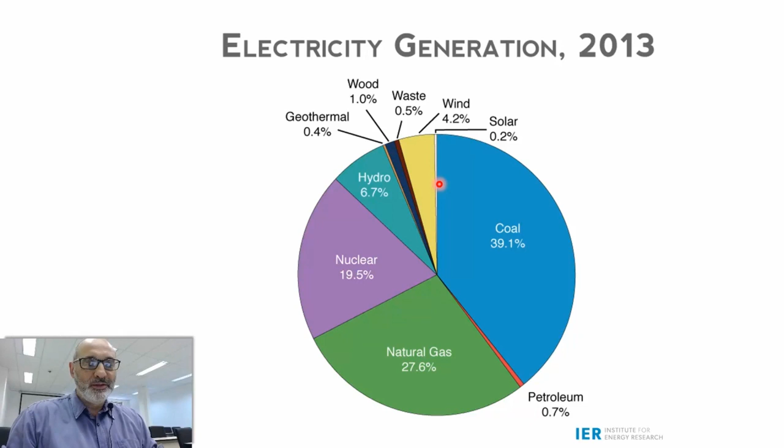I want to show you how turbines work and how we can use this information in order to optimize those systems of hydropower generation, or specifically water reservoirs. Okay, so we call them impulse turbines that are based on momentum change. Let me just make a sketch here.

This kind of turbine, for instance, you have momentum here, mass times velocity. If you have a change, you have a blade here, for instance, that changes the direction of this momentum. So it simply changes direction. By doing this, there's going to be a force. In order to do this, the blade has to apply a force on the wind, and the reaction to this force is the force that is going to be used to generate electricity. Those turbines are called impulse turbines. This small number here means reaction ratio, so it uses only momentum, change in momentum, in order to generate electricity.

Those turbines are very common, as I mentioned. Wind and hydroelectricity use impulse turbines. I put some here - wind turbine, everybody knows, but you also have vertical axis turbines, as shown here. Let me get my pointer. Those are the most efficient ones, but those types of turbines, vertical axis, for instance, are more appropriate for low noise applications. For urban generation, because you have concerns about noise generation, you may think about sacrificing a little bit of conversion efficiency in order to have lower noise levels.

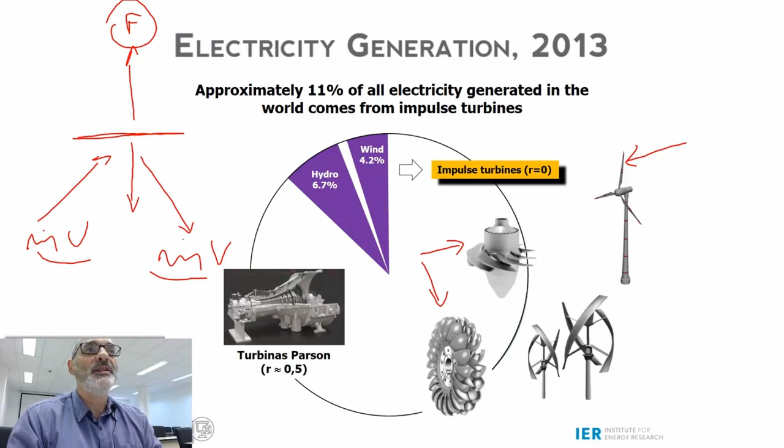Well, it depends. But in the case of wind turbines, you may build from fiberglass - these blades can be made from fiberglass. These types of turbines for water usually use stainless steel. I'm going to show you some pictures of those turbines, but that's the case: stainless steel for water turbines, and a light material for wind turbines. Composite materials, fiberglass and so on, are very appropriate for wind turbines because they are resistant and very light.

So, a word about how things go here in Brazil, because we have a very different energy mix. In terms of electricity, most of our electricity is generated from hydropower, 70.6%. This is very interesting, very good, because it's a renewable source. It's still solar energy, because it's the sun that takes the water from the ocean.

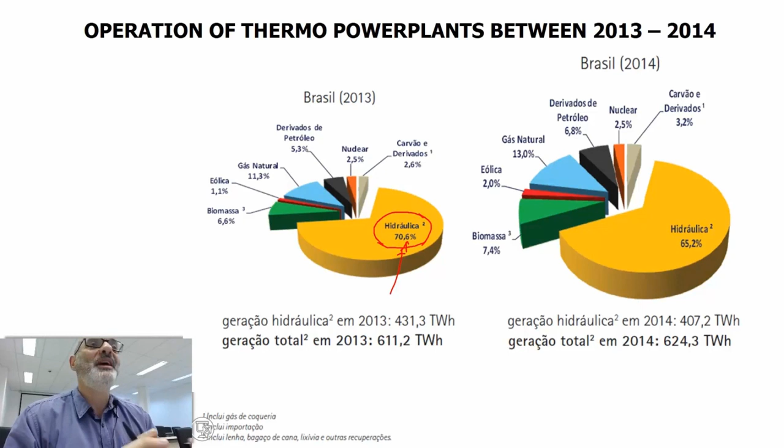So our eggs are concentrated on hydroelectricity, and the amount of rain may vary during the years. A few years ago we had some problems, especially between 2013 and 14. The amount of water available for electricity generation decreased significantly, and we had to put in operation thermal power plants. These power plants run basically on petroleum and natural gas. Simply putting these power plants into operation in order to supply electricity changed a lot our electricity mix.

You can see here, for instance, comparing 2013 and 2014, hydroelectricity decreased from 70 to 65%. Let me get my pointer, I think it's better. So this decreased, and the rest, especially coal, increased from 2.6 to 3.2. Petroleum, heavy oils, went from 5.3 to 6.8, and natural gas from 11.3 to 13.

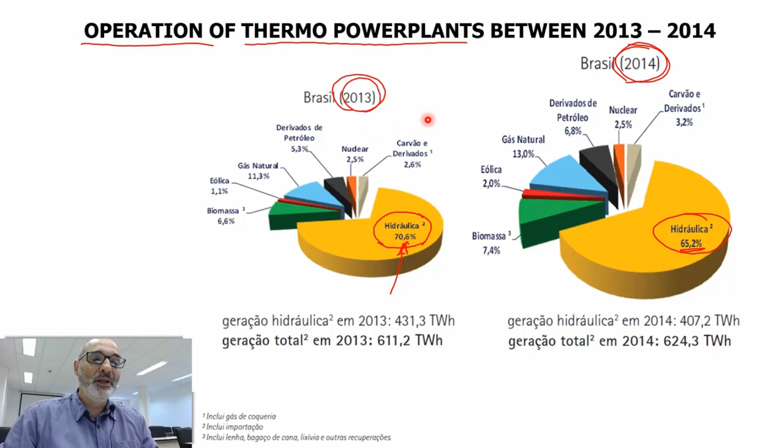But you have to do something to avoid this, because in addition, these thermal power plants are very inefficient, since they are built just to be used during one week or one month, not during a whole year, for instance. So they are very inefficient power plants. You see the importance of managing this resource. I'm going to talk today about managing this resource in order to avoid or minimize this type of problem.

Okay, let me move on. Let me talk about electricity generation in terms of potential. I'm going to compare the potentials of electricity generation in Brazil and in the world with the potential of hydroelectricity generation in the world. You're going to see that it's very limited.

Wind generation in Brazil - this is what we call the wind map here in Brazil, the atlas of wind potential, Aeolian potential in Brazil. The darker colors represent higher potentials. You see that it's mostly concentrated here on the northeast coast.

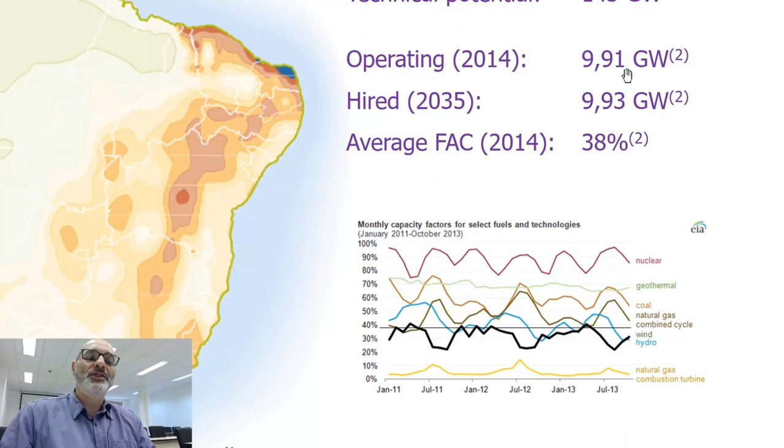Let's just see some numbers. The total generation is 71 gigawatts, so it's very high. The potential is 143. In 2014 we had only almost 10 gigawatts operating, and to 2035, another 10 gigawatts.

I'm going to show you also - I said I'm going to talk a little bit about how energy is commercialized here in Brazil, so I'm going to talk about those energy bids that I'm sure you hear about on television and in newspapers. So what this means and how we can calculate these numbers, 10 gigawatts. Another important point here is the capacity factor of our wind potential is a little bit higher than the world average, 38%.

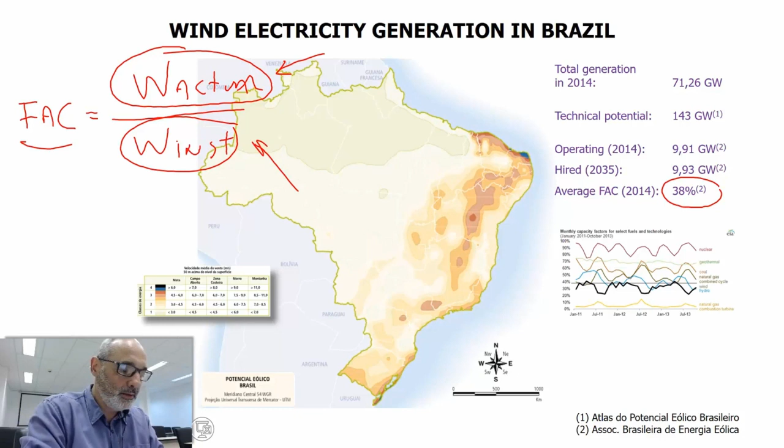Why is that? Because wind is intermittent, so you don't have wind all the time. So the average, let's say the annual average you have here, and the maximum. If you had constant wind 24 hours a day during a whole year, you would be generating this number here. So what you really have is what goes here. So the capacity factor is what you can expect to obtain from a certain place.

In addition to these potentials, let me zoom here. So in addition to the potential, you see those colors here, they represent wind speed. Black and blue is more than 6 meters per second, orange from 4.5 to 6, and so on.

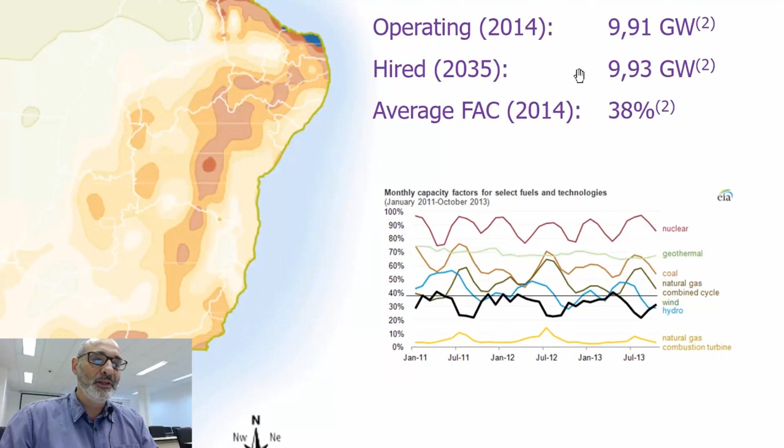São Carlos, just to give you an idea, our region here in the state of São Paulo ranges between 0 and 3, for instance. I know that São Carlos and Campinas have a lot of wind, but we're not even orange, we are yellow, or around here in the state of São Paulo. The potential for wind generation here is low, except for here you have the Mantiqueira. But that's the potential.

I have a larger picture here. This graph shows the intermittency of different kinds of generation. Nuclear, you see that it varies during a year. You may ask yourself, why does nuclear generation vary in time? Because you have to stop, for instance, for maintenance. You have several types of problems that render it impossible to have 100% constant generation. So it's a natural oscillation.

Geothermal energy is the most constant one, typically. And you see wind here in black. This black curve is the wind generation in the world, and you see that our average is represented here in dotted, it's 38%, a little bit higher than the world average. So we don't have a lot of wind sources, but they are very stable. This capacity factor is a little bit higher.

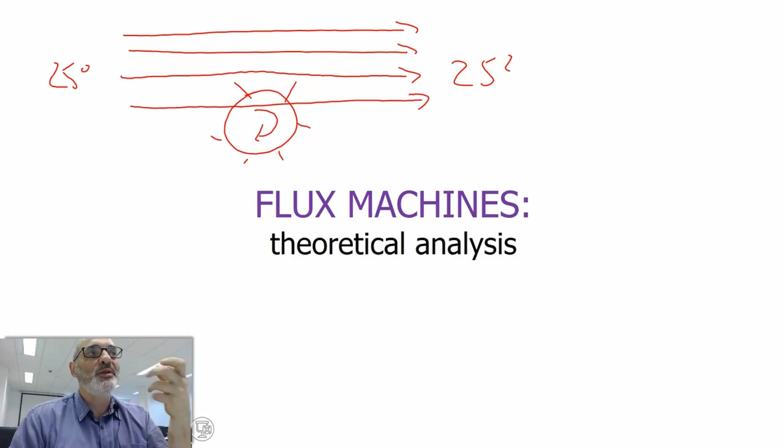Let me draw something here. The idea is that since we are not talking about reaction turbines, you have a flux here, and somehow you're going to generate electricity from this wind, but the temperature is not going to vary. If this is 25 degrees, you still have 25 degrees here, so those are flux machines. By contrast, in a steam turbine, for instance, you may have steam at, let's say, 150 bar, 300 degrees Celsius.

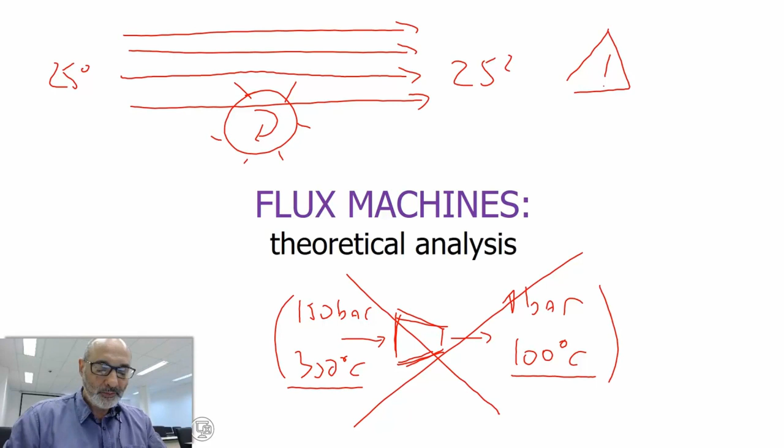And at the exit you may have 1 bar and let's say 100 degrees Celsius. So most part of the energy, usually in this kind of situation, we disregard the kinetic energy component of this energy. We consider only the thermodynamic components, because it's 1,000 times bigger.

So I'm not talking about this right now. I'm talking about this type of generation here, in which you don't have temperature variation during the process.

So what are the equations? Well, they have to be based on the first law of thermodynamics, so I'm recalling the first law of thermodynamics.

Just to show you the thermal component of energy, remember this is the energy inventory. So you have heat and work going in and coming out of the control volume of your system, and you have energy associated with these mass flow rates.

What I want to highlight, because this expression you already know, are the components. You have a component associated with thermal energy, associated with temperature. And you also have components associated with mechanical energy, related to gravity.

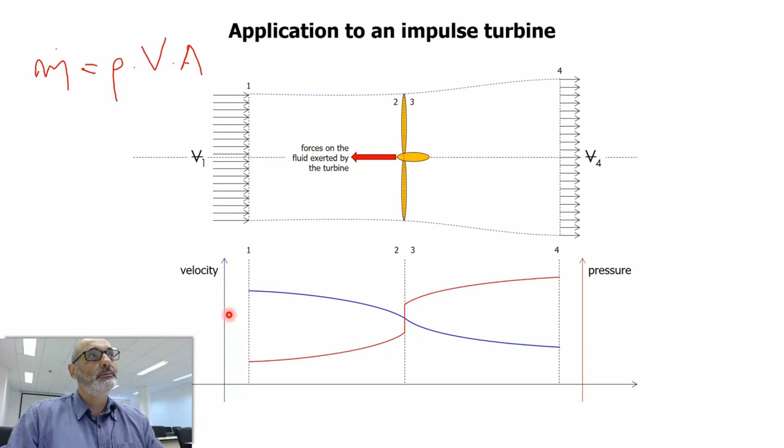Another thing I want to describe is the pressure and velocity along a line here from the entrance to the exit. If you could measure this velocity and pressure, you can always do this, you would see something like this.

I lost signal, I lost the background. From our conference, I can do nothing about that except verify... I'm still transmitting, but let me see on YouTube. I hope you get a signal in a few moments.

Let me continue. I was talking about measuring the velocity of the wind and also the pressure along these lines. Velocity is decreasing from left to right, from V1 to V4. You have a continuous line here because you have continuity - the mass flow rate cannot change.

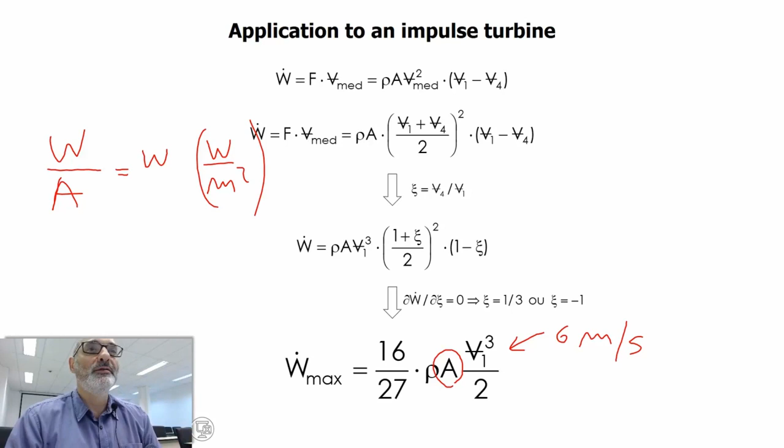We can use this equation, combining it - let me explain where I want to get to. I want to define a way of calculating an average speed for our assessments of the wind potential, for instance. If you divide - I forgot an important formula - you can define a kind of power density of the wind: divide by the area of your windmill, you get small w, in watts per square meter, that's the potential density of the wind. So if you want to generate, say, 1 gigawatt of electricity from wind, and your wind is 6 meters per second in that particular place, you can use these numbers to calculate the amount of area you're going to need, meaning the number of windmills needed to generate that amount of power.

Okay, so that's how you use this problem. But this is a theoretical maximum. You're going to see that you still have to multiply by the capacity factor, because this amount is instantaneous, obviously. If you manage to have this during 24 hours a day during the whole year, but that's not a reality, that's not practical. So let's move on and see what's going on here.

Let me show you the application of this formula. Suppose you have 9 meters per second, that's your average wind speed, and that must be in Patagonia, for instance, because it's a very high wind speed. And you have a 20 meter diameter mill. Since ξ for maximum generation is 1/3, this means the velocity decreases, divided by 3, so 9 divided by 3 equals 3, so the wind speed at the exit is 3 meters per second.

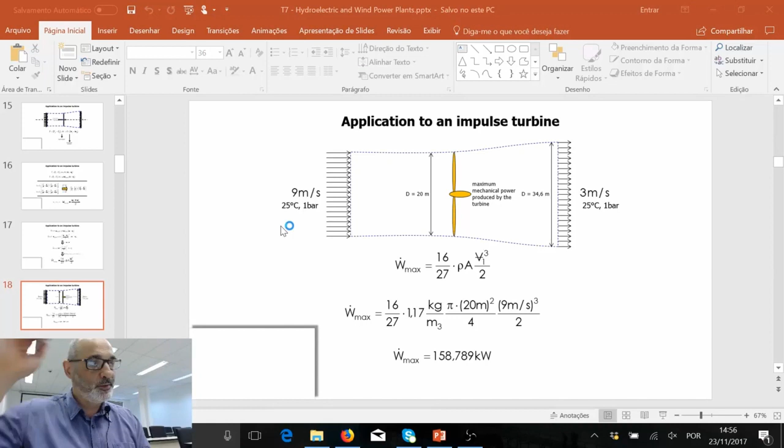And if your capacity... What happens at low temperature? Let's say you have 9 meters per second. Lower temperatures affect the density. The density at lower temperatures is higher, so it's going to increase. We can do this calculation right now. I'm going to stop my presentation and calculate the density of air at these temperatures. Suppose, since I mentioned this must be in Patagonia, let's calculate that near 0 degrees, for instance.

Let me choose pseudo-fluid air, so I'm working with air, and let's calculate the density at 25 degrees, 1 bar, that's the example I showed you, and at 0 degrees, 1 bar. So you see density varies from 1.16 to 1.27. So in these calculations, this number 1.17 is going to change to 1.30 or something like this, or 1.28. So this number here is going to be 1.28.

So it's going to increase a little bit this power here. So it's better to have lower temperatures because the density is higher. That's an example of how these equations must be used. You also remember, this is the maximum, you should multiply this by the capacity factor, which let's say here in Brazil is 38% on average.

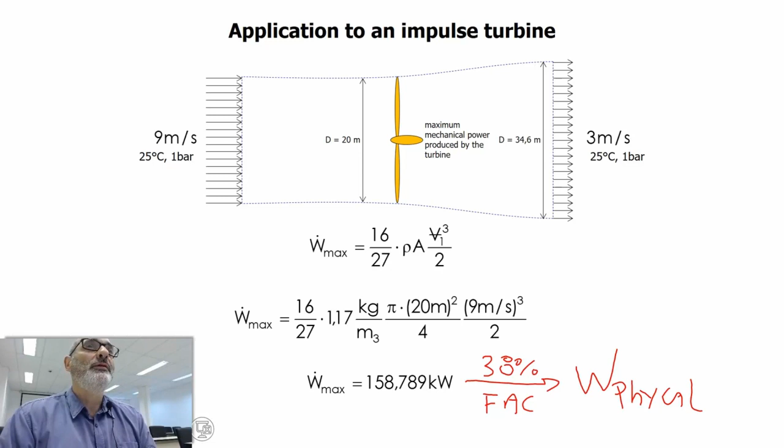So you're going to get roughly, well, you see a smaller number. So here, the number that you obtain here, just to start using the terms we use here in Brazil, the Brazilian jargon, is what we call physical power. So this physical power, that's the Brazilian term, that's the average power that you can get in a year. So if you're going to sell this energy to someone, you're not going to sell this number, you're going to sell this one, because that is what you can expect from this statistical number here, the capacity factor.

Let me move on. So just to still develop these equations, that's the formula we deduced for the wind generation in terms of ξ, which is, remember, the relation between exit to input wind velocity, what we call the power coefficient. So wind power is this number. It's impossible to extract 100% of this power from the wind. It's physically impossible.

By design, ξ can be made equal to 1/3, which maximizes the power coefficient. If you plot the power coefficient, you see that the maximum value is attained when ξ equals 1/3. When you replace 1/3 in this formula, you get 16 divided by 27. So that's why you have that strange number, 16 divided by 27.

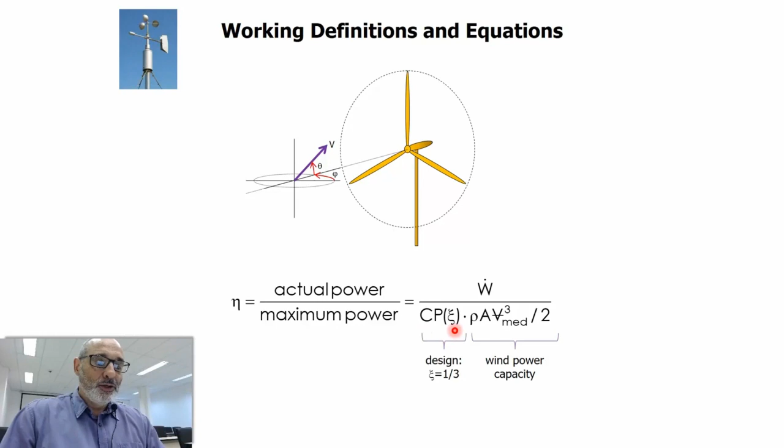We can generate an efficiency number like this: that's the actual power that you get from your windmill divided by the maximum power, which is the wind capacity multiplied by the maximum power coefficient. CP is for coeficiente de potência in Portuguese - sometimes I mix the terms, sorry for mixing Portuguese and English. So that's a definition for wind power.

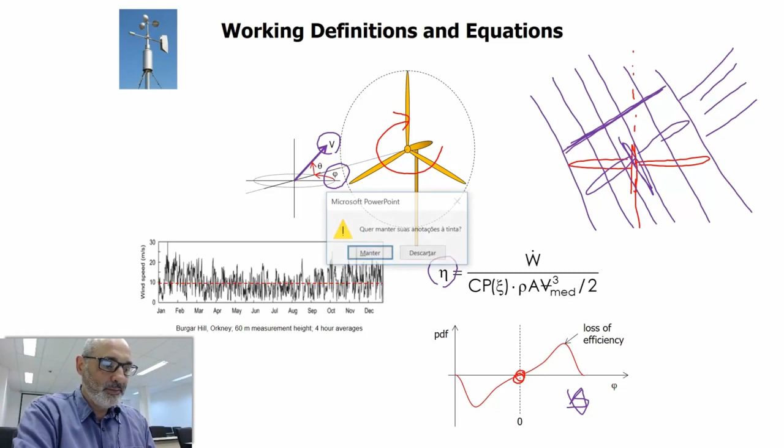Is there a possibility of building a windmill that has the ability to change according to the direction of the wind? Is it possible? Yeah, they do this. Actually, this type of mill does this automatically. But the point is that this realignment is going to take some time.

Let me explain this better. I'm going to create a blank slide here in order to draw something for you. Suppose here we have time, and here is the difference in terms of alignment, delta phi. Delta phi is the alignment of the windmill compared with the wind direction. So the idea is that if you have perfect alignment during all the time, it's going to be like this signal here.

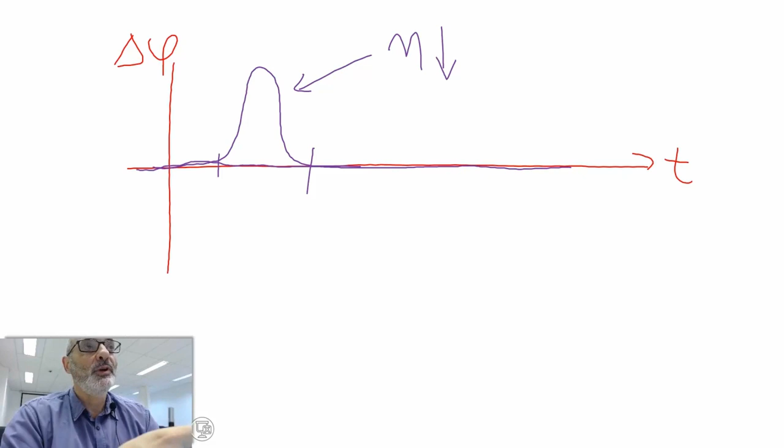If the wind changes, the windmill can realign, but it's going to take some time. So the wind changes and you have a deviation during some amount of time. And the point is that during this period, from this instant to this one, you have decreased conversion efficiency. All windmills are built to realign with the wind automatically, but depending on the geometry and configuration of the mill, this may take some time. Is this clear for you? Okay, let me move on.

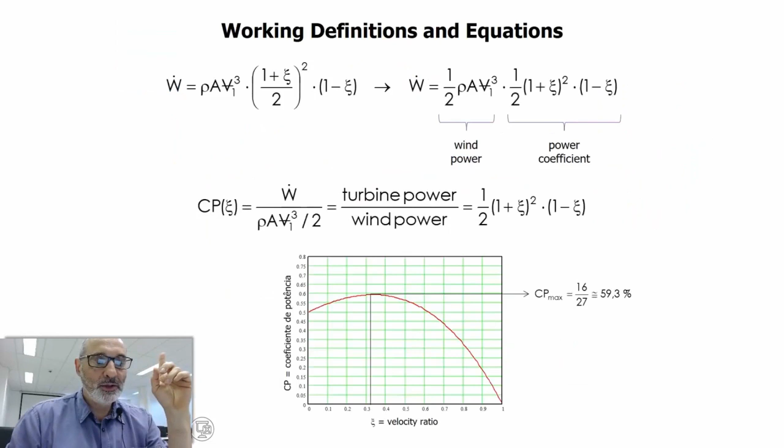I want to talk now about other factors causing efficiency losses. As I was elaborating, you have a problem related to the direction of the wind, where your mill is slightly misaligned. You also have other types of effects, for instance what we call wingtip or wing effects. Going back a few slides, these blades are exactly like airplane wings, with high pressure here and low pressure here.

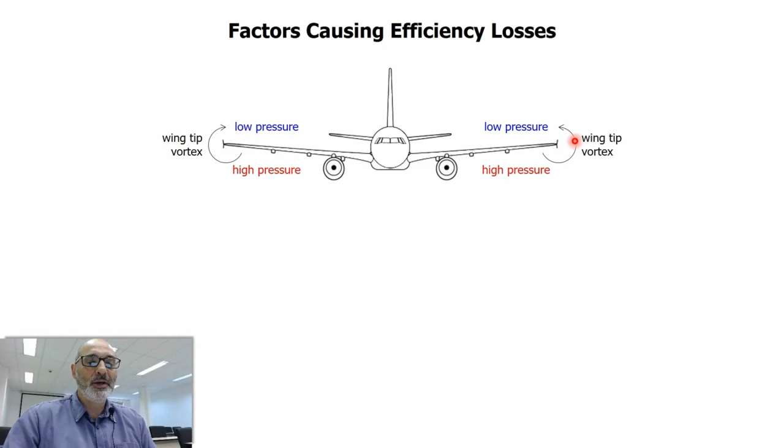Going back a few slides to show you this: you see low pressure here and high pressure here. That's exactly the same, and the difference is exactly the lift force. So high pressure here, low pressure at the wing tip. What's going to happen is the fluid moves from the high pressure region to the low pressure region, forming what we call wingtip vortexes. These vortexes consume energy because they're using energy to create this circular movement. This is a very common phenomenon in airplanes.

It's very easy to see - when an airplane passes, you see these types of vortexes. If you type 'wingtip vortex' on the internet, you get very beautiful pictures of wing vortices. But the point is that you have losses of energy because you're spending energy to create this circular movement, when the idea was to convert all the internal energy into kinetic energy. So you also have wingtip vortices in windmills.

In aeronautics engineering, in order to solve this problem, engineers developed - I forgot the name - these small structures called winglets. They developed this kind of device which generates an opposing effect, so they tend to cancel this vortex, but they cause drag. So it's a trade-off solution.

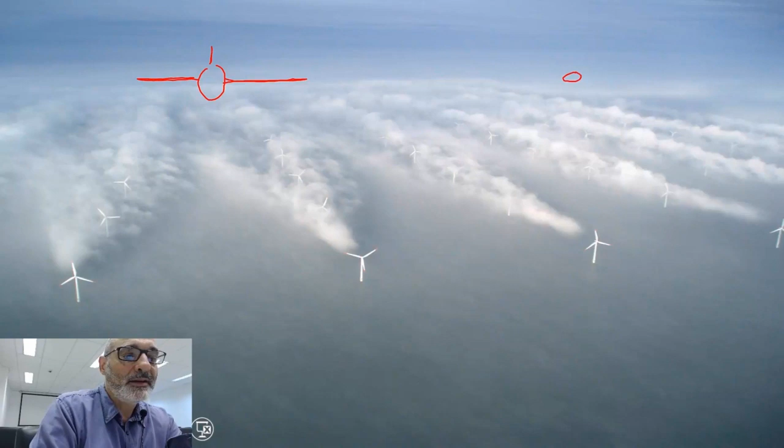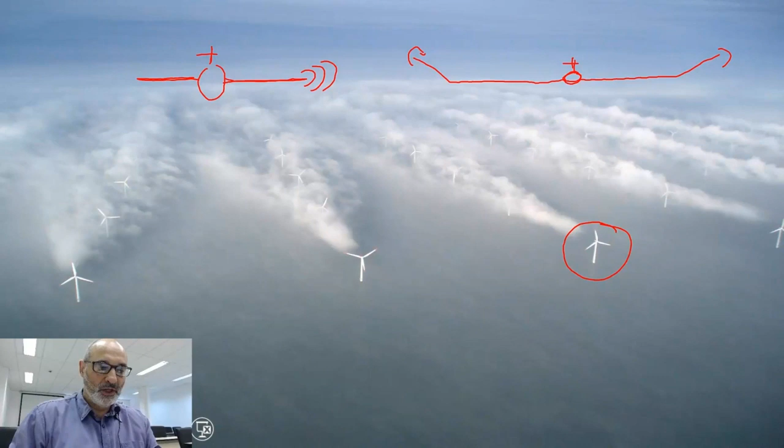And that also explains why gliders have this shape. Let me draw something here. A commercial airplane is something like this, and a glider's wings are sometimes even longer than that. So that explains why gliders have very long wings - the longer the wing, the smaller these vortices.

And that's why windmills also have very slim and long blades, in order to decrease this phenomenon. Some words about wind turbines - some details here to depict a scenario. Since the longer the blade, the more efficient the windmill, because you decrease these wingtip vortices, the tendency you see over the years is to have bigger and bigger windmills.

Well, after about 100 meters, you start having problems building and installing these windmills, because you have to produce these blades and transport them through the countryside, where you have small roads. So what limits the size of the largest onshore windmill is actually the road systems, the size of the roads.

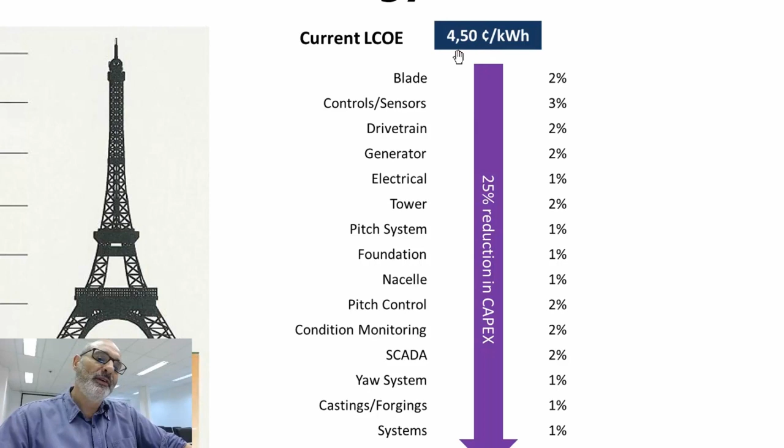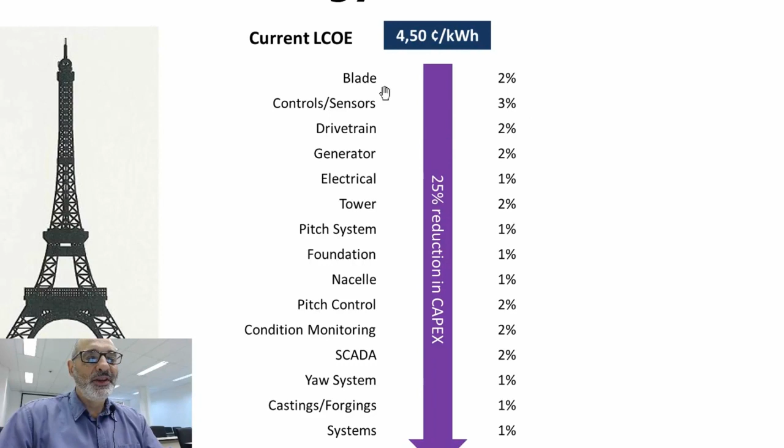But before describing this, I want to show you this picture here. I'm going to zoom in. These numbers here are what researchers are expecting to obtain in terms of cost, the evolution of this cost. So this is 4.5 cents per kilowatt hour.

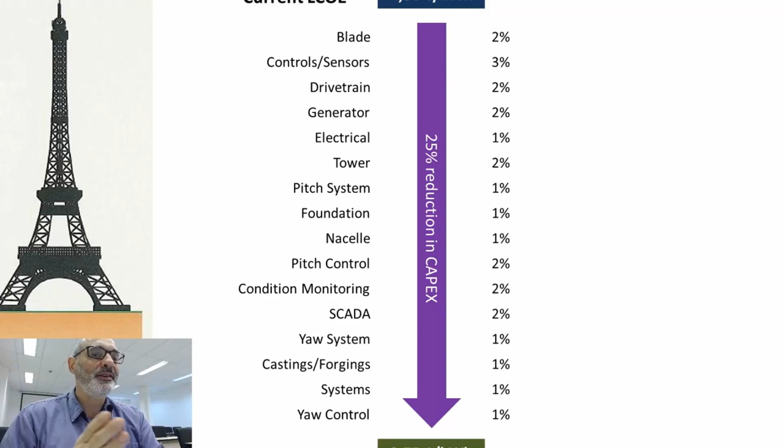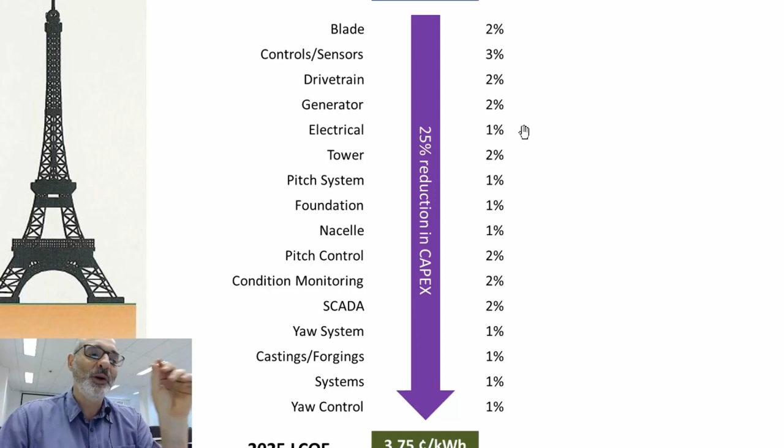In 10 years, it's expected to decrease to 3.75, and this decrease, that's what's interesting about this result. This decrease is obtained by a series of incremental gains. You have a small gain to obtain in blade geometry, for instance, and a small gain in developing more stable, more structurally stable towers, and this is related to the deviation, the stability of the windmill, of the turbine. So you have a series of incremental developments: the controlling system, the yaw system, the foundations, this is also related to structural stability. So you see, you have a significant reduction, 25% in the cost, but this reduction is actually obtained through a series of small incremental developments.

And this is to show you, to justify when we state that wind generation, wind turbines, is already a very mature technology. It's not a technology in development. Well, these types of technology, these balloon turbines and so on, I'm going to show you in a few moments, are still in development. But these very traditional windmills are already a very mature technology, you can say that.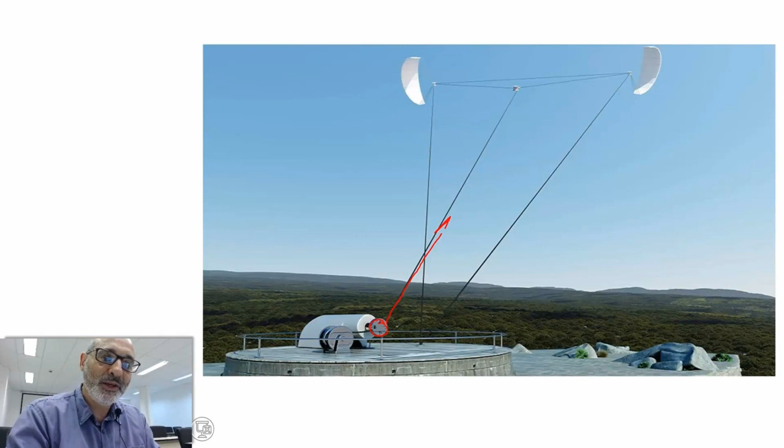These are actually wings, and their movement can be controlled so that you can generate electricity. How you manage to do this is through a robot. I think the next picture is better. I don't know if you guys, when you were kids, had kites. Here in São Carlos, I was completely fanatic for kites when I was a child. So what do you do? This is a robot for kites and for electricity generation, so it's very simple. You see this pulley here.

So what the robot does, it increases the length here, it gives some slack to the kite. So by increasing this length, what's going to happen? It's going further away and down here. So you release the force here, and the kite goes down and farther apart. Then when you do this, you have a force. So by doing this, the kite manages to generate some force. So the kites are pulling this cable here.

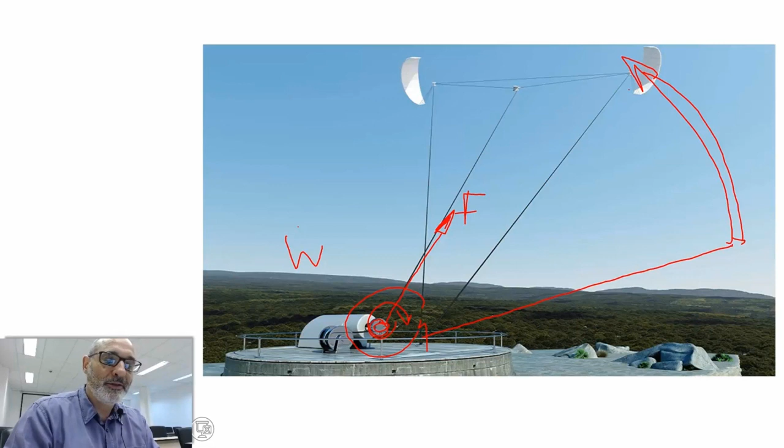So you have a force here times this rotation here, so you have power. But your kite goes down, then you have to rewind the cable so that the kite goes up again. So you're going to spend some power. So you can generate power in this first phase, and you spend power in the last phase.

So the idea, if you plot the power that you generate and the power that you spend during time, the idea is that you can generate power for a certain period of time, then you have to spend some power, then you generate again. You see that the average is positive, so you can generate some power from the system. That's explained in this graph here: you have an active phase in which you can generate power, and you have a return phase in which you may or may not spend a significant amount of power.

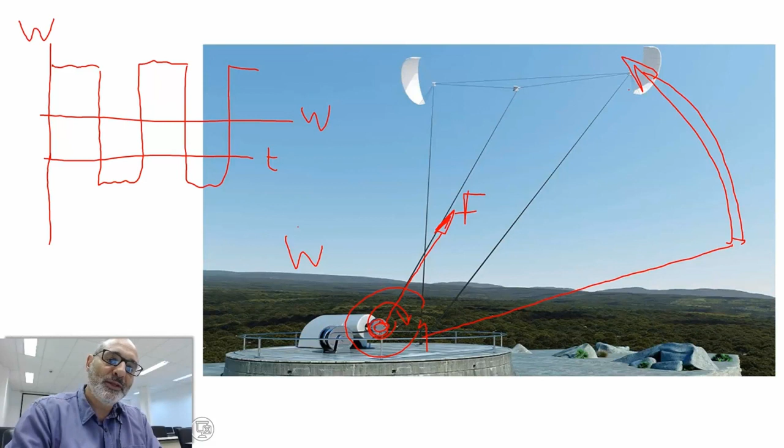So that's a technology that is being tested. You have robots to do this, that in addition to making these operations, it assures takeoff and several other types of piloting for this wing, because it's actually a wing. This is another type of kite, a little bit different from this configuration here, because this one does this type of movement here. This one, it's a wing, it circulates like this, and during this circle you have an active phase and a passive phase, I would say, in terms of energy generation.

Well, this is research, it's not widely applied. You also have... I want to start switching, because I have to hurry up a little bit. I'm going to start switching to water turbines. So you can generate electricity from water, from a river for instance, like in this example here. If you have a very huge river in which it's impossible or very difficult to make a reservoir, you can generate electricity with a series of water mills like this one.

Okay, you can do this, but this is feasible. However, here in Brazil I would say this is not practical, because our rivers contain a lot of organic materials, biomass actually. You have trees and all types of debris being carried by the river. You may have a whole tree being carried by the river. When these debris hit the windmills, it's going to spoil them, and you have maintenance problems. So this is a problem here in Brazil. For this to be applicable, you have to have very clean rivers, and this is not very easy to get.

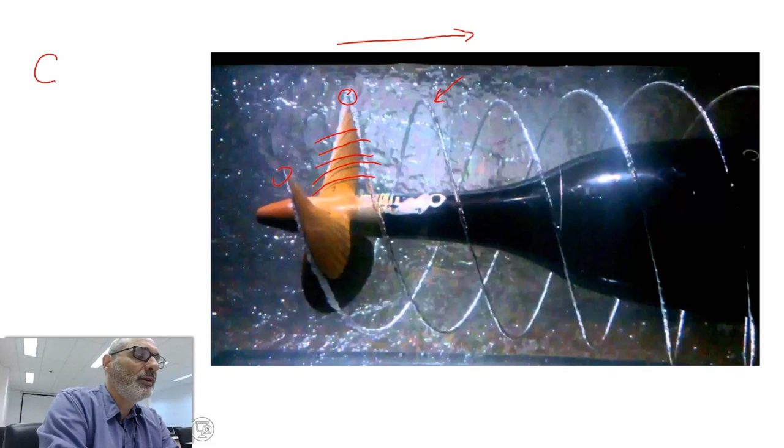But it's possible. Another problem related to water, which you don't have in air, is cavitation. Since you have different velocities, there may be places, especially on the tips, where the velocity is very high, and when the velocity is high, the pressure is low. That's Bernoulli's equation. So when the pressure is low, you may have water vapor, small vapor bubbles forming - that's cavitation. I don't know if you've heard the term.

The problem is that when a bubble forms, it's stable when the pressure is low, but if for some reason this bubble goes into a region where the pressure is high, it's going to implode. When a bubble implodes, it causes what we call a water hammer - like hammering, a huge impact related to the implosion of these bubbles. You may have very huge pressures associated with this implosion, and these can erode parts of the blades, as shown here. So you have maintenance problems.

I remember some 10 years ago I visited one of these hydroelectric power plants here near São Carlos in Ibitinga. The turbine is very big - a person here would be something like this. You can go on top, and we observed this kind of problem. So the workers were correcting this problem, because you have cavitation.

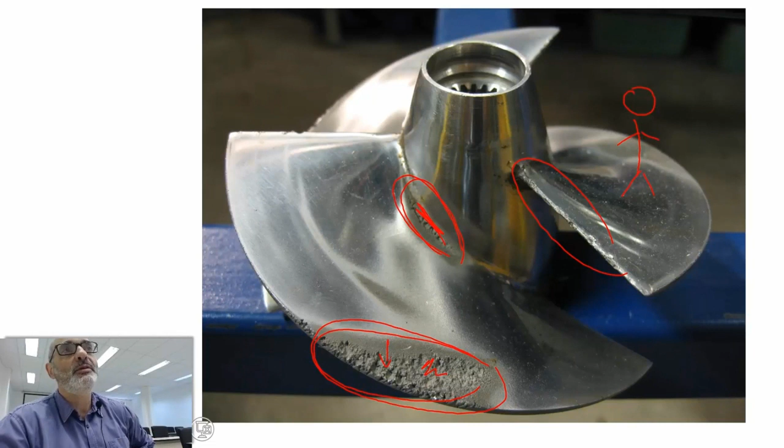Is there a problem in the water pump also? Yeah, cavitation, exactly the same thing. Cavitation related to these very huge pressure variations due to the implosion of these cavitation bubbles. If you could see with a microscope, it's like having microscopic hammers impacting on the surface of the metal, and you get this kind of erosion. It's a very big problem even for ships - you have this in ships also. Cavitation is a very significant problem.

Let me move on. Since we're talking about water turbines, let me talk now about hydroelectric power plants. The equations for the analysis are going to be the same, but I want to elaborate a little bit more because I also want to talk about operation. I just tackled the problem related to windmills - I was talking about the deviation, the difference between where the wind is coming from and the alignment of the mill, but I didn't elaborate further than that. In this case, with hydroelectric power plants, I want to elaborate more in order to explain how things work here in Brazil. I'm going to explain how we design a power plant like this and how we should operate these power plants in order to maximize power generation.

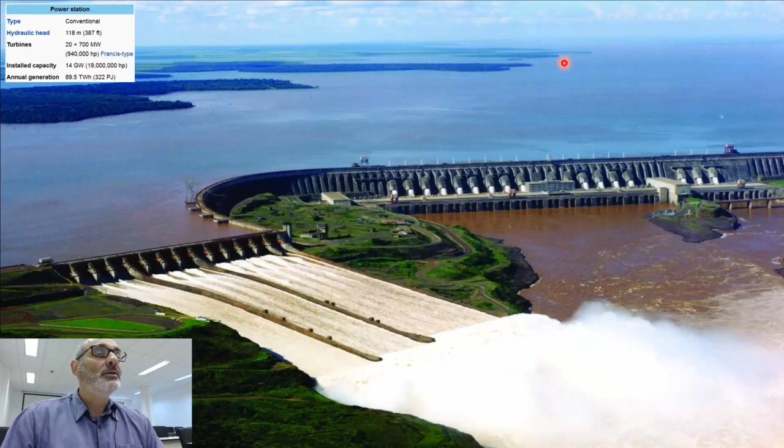The point in showing you these pictures is to show you that the river is surrounded by mountains and hills, while in Itaipu the region is very flat. This is an important point I'm going to show you in a moment.

Just some numbers - forgive me with the Portuguese, but I don't have access to edit the picture to translate the term. Let's compare some numbers between Itaipu and Three Gorges. Turbines: Itaipu has 20 turbines, Three Gorges has 34 turbines plus 6 underground turbines, so 40 turbines total. The installed capacity, 14 gigawatts, is the sum of 20 times the individual capacity of each turbine.

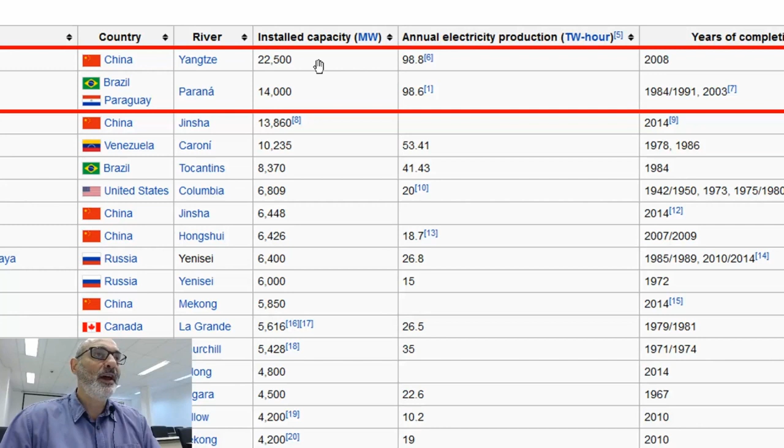Well, actually this is very out of date. But what I wanted to highlight is not the installed power - let me go back a few slides and zoom in to show you the installed capacities and the annual generation. You see the installed capacity in Three Gorges Dam is almost twice that of Itaipu, but the annual generation is almost the same.

And why is that? It's not only due to the capacity factor, but also due to the reservoir - I'm going to show you this. The numbers here are very out of date, but the point is the reservoir, not the turbines. As I mentioned in the first slides, it's the functionality of the reservoirs.

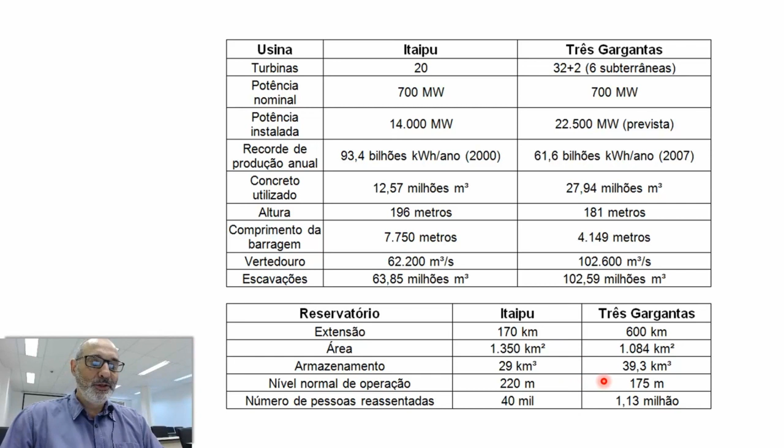You see the reservoirs are compared here in this table, Itaipu and Three Gorges - in Portuguese, gorges is garganta. The extension, since Three Gorges is in a valley, is very significant at 600 kilometers, while Itaipu is 170 kilometers. The area is roughly the same - Itaipu is larger because, as I showed in the picture, it's a very flat region in Brazil. And the amount of water stored in these reservoirs is 29 cubic kilometers and almost 40 cubic kilometers.

Well, this is stored energy actually, and the potential is related to the level, the height of the water - 220 meters in Itaipu and 175 meters in Three Gorges. So with these characteristics, we're going to run our final simulation.

I'm going to show you a simulation. I'm going to model the system, and then we're going to change the size of the reservoirs in order to simulate the operation of a system with big reservoirs and with small reservoirs. So the idea is to compare Itaipu and Three Gorges, or the equivalent systems.

Let's see the equations for this type of generation. So you have a reservoir, so you have a difference in height - from point 1 to point 2, you have a difference in height.

If you define a control volume, for instance, let me draw the control volume here. Imagine a small tube starting at point 1 and going all the way through the turbine, ending at point 2 - that's my control volume. I can't draw this properly, but you can imagine a small tube going from 1 to 2, and that's going to be our control volume.

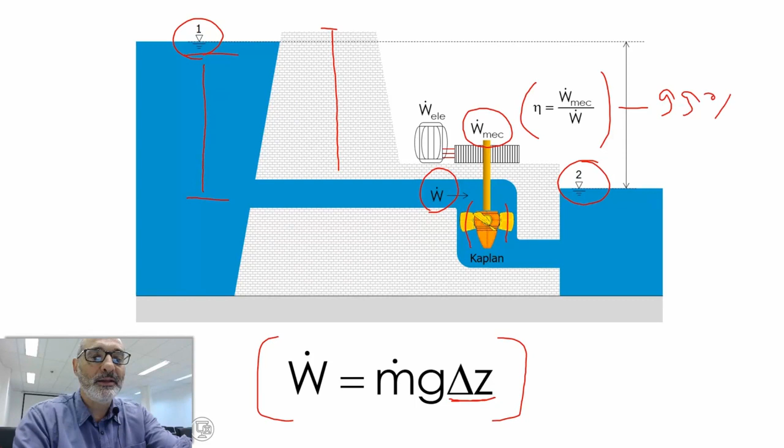That's why the height of the water level is important. And that's why, going back a few slides, Itaipu has a bigger height than Three Gorges, and that's why it tends to generate, from these parameters, more electricity, because the height is bigger. So that's our working equation.

We're going to apply this. So that's the maximum power that I could manage to generate from this variation, from 1 to 2. But I also have, let's say, an actual power that I get here, and the actual power will depend on all the problems related to the efficiencies, to the flow through the blades of the turbine. So the actual power is going to be slightly lower than the maximum theoretical power, and the relation between the two is the efficiency.

Be advised that when we talk about water turbines, especially very big water turbines, this number tends to be 90% and even more. So the efficiencies are very significant when we talk about water turbines.

Okay, let's move on, some numbers. I'm going to use this equation to make a very approximate calculation in order to assess the potential for hydropower generation in the world, because I already mentioned in the beginning that the potential for growth is very limited in the world. So I want to get this number. Let's see how we can get this potential for growth from very, very easy to obtain numbers.

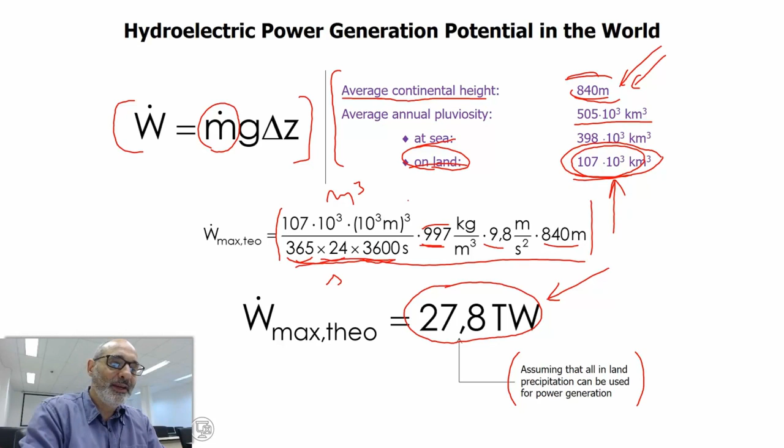107,000 kilometers, times 10 to the third meters cubed to convert to meters, and let's say 365 days times 24 hours times 3,600 seconds each hour. So that's the total number of seconds in a year, and here is the amount of cubic meters of water on land in a year.

Multiply this by water density. We have, there's a mistake here, let me see.

So that's the density, okay, because this is cubic meters per second, which is volumetric flow rate. I multiply this by density to obtain mass flow rate: 997 kilograms per cubic meter, that's density of water, times G, times the average height. When we do the calculations, we get this number, 27.8 terawatts.

This is a very optimistic number, because it considers that all precipitation inland could be used for power generation. We know that's not the case, because most of the water that falls is absorbed by the soil, goes to the water tables and so on. Just a fraction of this number can be used for generation, but no problem, the idea is just to have an assessment.

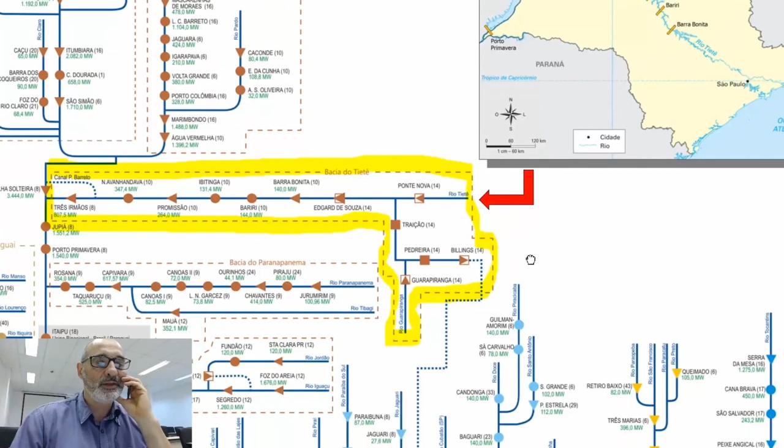Let's focus on that simulation, how things are done not only here in Brazil but everywhere in the world. You have rivers, as I'm showing here in the state of Sao Paulo. This is Rio Tietê, it's a funny river because it starts near Sao Paulo and goes inland. Most rivers go to the sea, and this one actually does too, but it makes a big turn - it goes near Mato Grosso, then down, all the way to Argentina. So these waters will end in the Atlantic Ocean, but in Argentina. I'm going to show a bigger picture in a few moments.

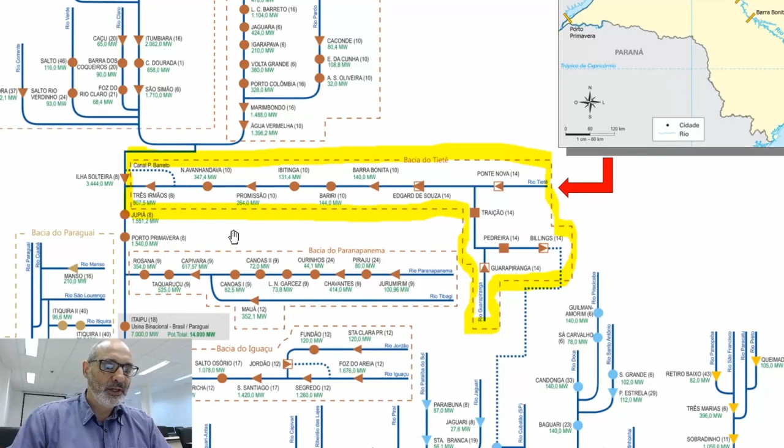So you see, the Tietê River is completely exploited in terms of its potential. If you look at the topography, here the ground is very high, and it decreases slowly as you go west. In Sao Paulo, the reservoir is very high, so it goes down - that's why the river flows in that particular direction.

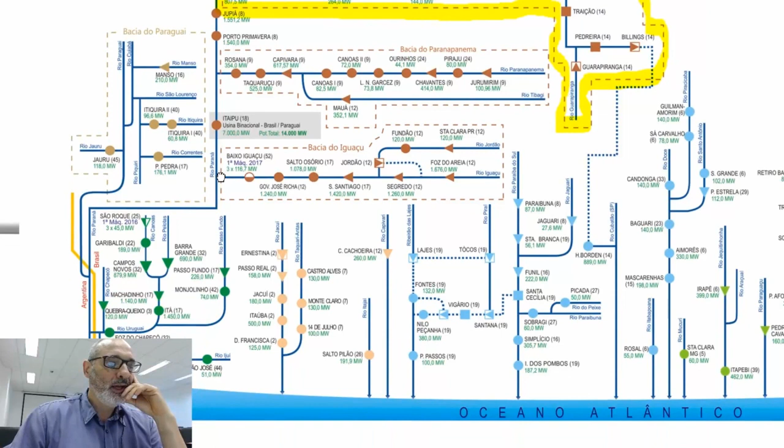But the reservoirs are already close together - you have one reservoir here, and the height of this reservoir is almost at the level of the next reservoir. So when I say it's completely exploited, that's the kind of topography you have. The tip of the reservoir here is at the foot of the dam here, as I'm drawing. So you have this series of reservoirs.

Barra Bonita, Bariri, Ibitinga - that's the one I visited a few years ago, as I was mentioning. And you have Três Irmãos, Jupiá, and so on. If you see the whole scenario here in Brazil, these dams in the Tietê River are represented here. I'm going to zoom out - I think it's interesting.

So let's see how this system is set up here in Brazil. Tietê is here, Rio Tietê, you see here, and those are the reservoirs. This picture is very rich because it shows places for ships to go up and down through the reservoir, and it also represents the capacities of the reservoirs.

This graph has several different types of information, so it's very rich. That's the Tietê River, which connects to Paranapanema, another river in Paraná. They get together in Rio Paraná. So let's follow the water.

That's Rio Tietê in Sao Paulo. These circles and triangles and so on are generation units. That's Sao Paulo, the city of Sao Paulo is more around here. So Billings, you see Billings and so on.

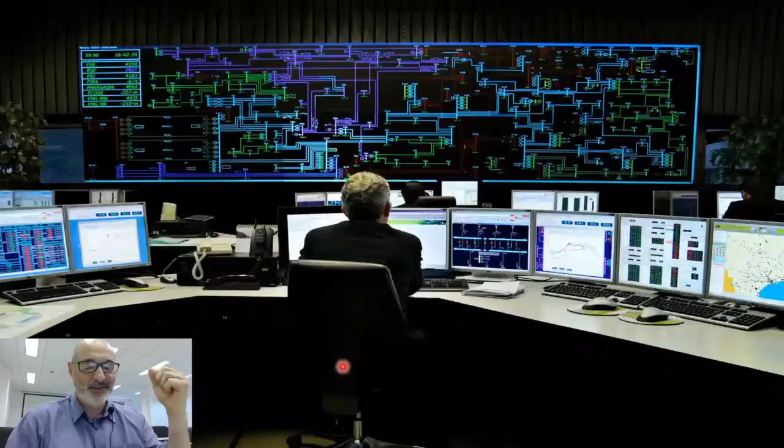This picture is what we call the Operador Nacional do Sistema Elétrico, the national operator of the electrical system here in Brazil. So he has this image here, all the reservoirs, and you can control the operation of each of these reservoirs.

You can press a button and increase the flow rate in a specific power plant, or if you don't have this level of automation, you can simply telephone the local operator and tell them to increase flow rate, for instance. So the idea is that you can operate the entire system from a single room.

The simulation that I'm going to show you in a few moments is how to operate - what's the strategy of operation in order to maximize the overall energy production, both in terms of volume of energy, but also in terms of stability of generation.

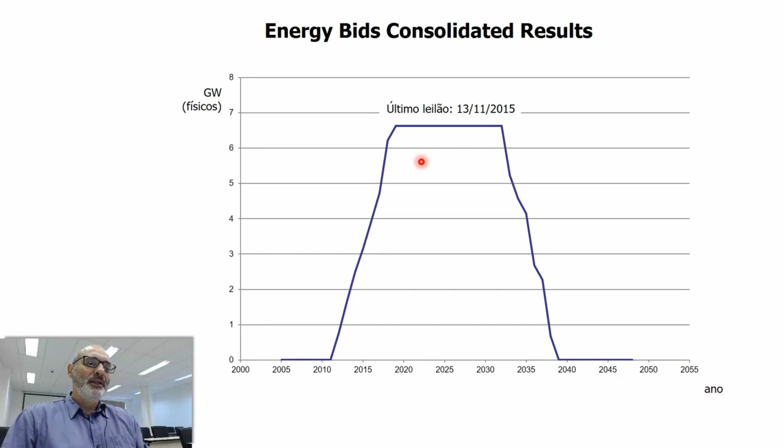You have, for instance, the amount of energy, the total amount of energy that was commercialized, if this is to be delivered in 10 years or in 20 years and so on. You have all sorts of information, the price, if it's a bid A0, for instance, that's for instantaneous, immediate supply. If it's a bid A5, for instance, the seller has 5 years to start delivering the energy.

Okay, so you have many types of information. I'm going to show you next week, and from this database, you can, for instance, build this type of graph. I didn't bother to put the current data, but this graph is the total amount of commercialized energy.

So physical gigawatts, by physical, that's the installed capacity multiplied by the capacity factor. Okay, so this is real. And you see that in 2015, that's the current date, you already know how much energy, or new energy, you're going to have in the following years. So you have increased amounts, and then it drops.

And the idea is that since these bids are regular, this curve, or this dent I would say, travels to the right here. So when we integrate, we have an idea, we can forecast how much energy is going to be in the market from this database.

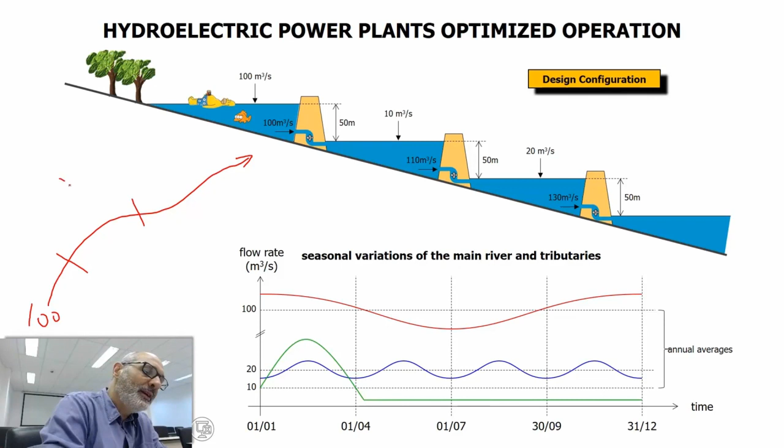Next week, we're going to work with this spreadsheet. We're going to open it and construct this kind of graph. You can filter, for instance, in terms of source. If you want to know how much energy from wind you're going to have in the following 35 years, you have this information. It's very easy to filter that from that spreadsheet. I'm going to show you next week.

So an example of application: optimized design and operation. In order to explain how you can have an optimized operation, you must know, at least in rough lines, how a hydroelectric power plant is designed. So I need to talk a little bit about design in order to justify why the operation has to be that way.

So let's see the problem, and let's define a synthetic problem, just to exemplify. Let's take this case, just to build a scenario for us. So we have 3 reservoirs like this. That's the flow rate of the main river, 100 cubic meters per second, feeding this first reservoir. The second, that's the height, the nominal height, I'm going to explain this.

That's the second reservoir, it has one or some tributaries, so you have an additional 10 cubic meters per second from rivers arriving here. You see what I mean? Let me get my pen. So you have the main river flowing that way, 100 cubic meters.

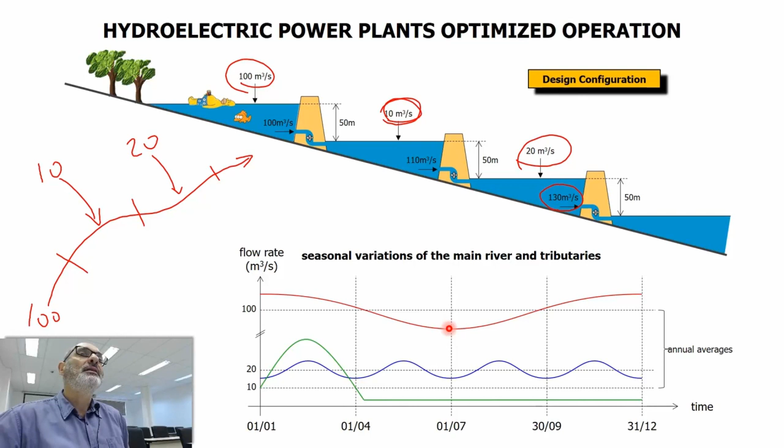Okay, so that's our market. Let's say we have to choose a kind of turbine. When we calculate the specific rotations for the data that we have - this height, this flow rate, and so on - we get these results: 3.14, 0.5. So we're going to choose Kaplan turbine, since 3.14 is around here. We could choose Francis, but I'm going to choose Kaplan, because I know that in the Tietê River they are all Kaplan turbines, just to remain close to our local reality here in São Paulo. So we're choosing Kaplan turbines.

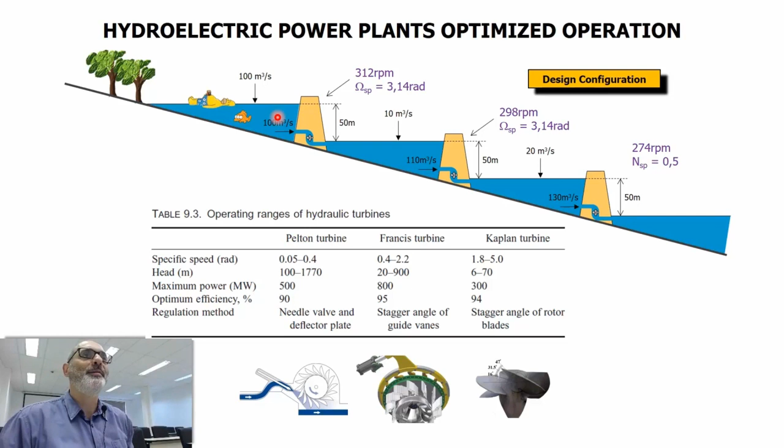Here's some more specific data in terms of the application, in terms of delta H, what we call head - that's from the jargon - and typical efficiencies. Let me move on. So let me now define the problem.

The problem is that the design is based on nominal parameters - by nominal I mean annual or pluriannual averages, the average flow rate and so on. So the result is optimized, the maximum efficiency is optimized for these nominal parameters, but the actual instantaneous operation parameters vary with respect to these nominal parameters. For instance, the instantaneous flow rate varies - this 100 cubic meters is the annual average, but the instantaneous flow rate is varying, as I showed you here.

So that's the point. When we design a power plant, we design for these average values - 100, 20, and 10. But the instantaneous reality of operation may be different. So that's what is said here: the operating parameters vary with respect to nominal parameters. So we have this problem. That's a key point here.

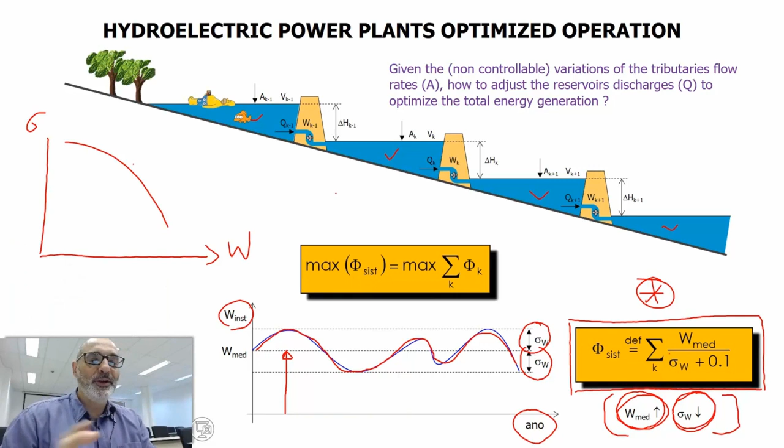So at this point we identified two things that we want to optimize, and we have a choice to make now. We can formulate the problem as a multi-objective optimization problem, and we end up with a kind of a Pareto frontier. In a multi-objective optimization problem you get something like this: you plot W here, sigma here, and you may have a Pareto frontier, which is your non-dominated points. So that's multi-objective optimization stuff, and we're not going to follow this path.

We're going to transform our multi-objective optimization problem into a single optimization problem by defining this artificial optimization function. So let's see how it works. If we want to increase W, and we want to decrease sigma, we can calculate this: we can put W in the numerator and sigma in the denominator. So when W increases and at the same time sigma decreases, that means that phi increases.

That's completely artificial. We're going to have different optimization functions, but the idea is that when we get the behavior that we want, we can transform this into a characteristic behavior of our single objective function. So that's it, and that's a possibility.

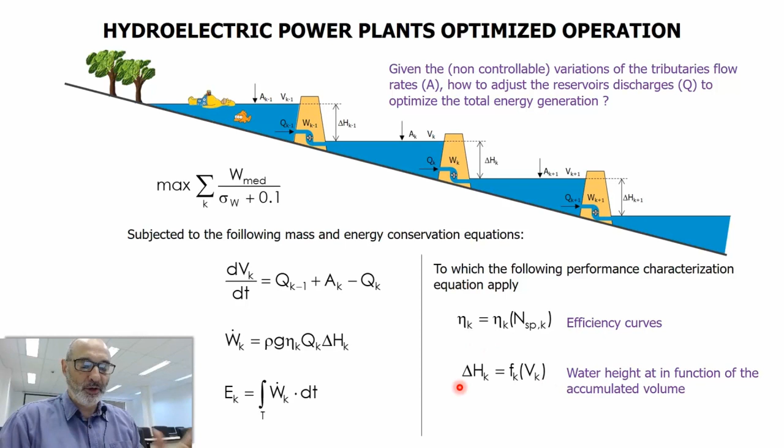...the turbine performance. That's the conservation of energy. The instantaneous power generated by the turbine is equal to the formula that we derived a few slides back, multiplied by an efficiency factor here. Eta is related to the efficiency, which relates to these curves here, and that's the central point. So you have mass balance, you have performance equations, and if you want to assess the total energy generation, you simply integrate the total power.

Related to this performance, the turbine performance is characterized by its efficiency. Eta is a function of the specific rotation, as I mentioned. You also have a very important parameter, or variable to be more precise, related to delta H. We call it head, that's the jargon, but it's the height of the reservoir, or the water level. This relates to the volume through the reservoir. We could say that delta H is a characteristic of the reservoir performance, and this is related to its geometry.

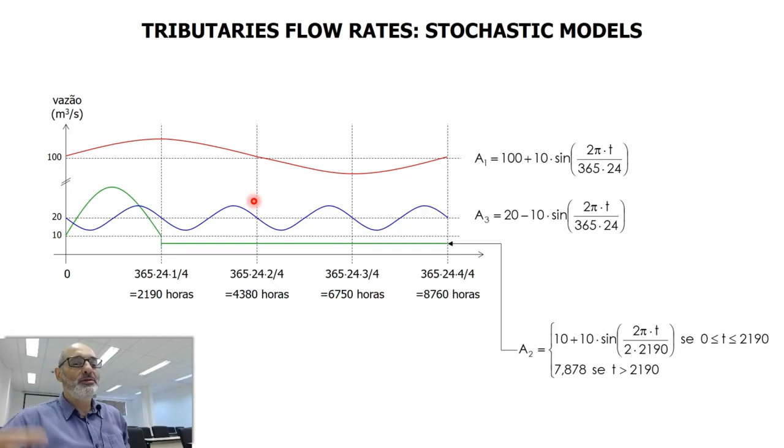We are going to define some mathematical formulas to simulate this kind of behavior. For the main river, we're going to have harmonic variations. So 100 is the average flow rate, with a sinusoidal variation around 100, as drawn here. The blue river is going to vary like this, around 20, so it's a sinusoidal variation as well. And the green river has a sinusoidal variation during this period, and then a constant flow rate. The corresponding mathematical formula is given here.

The average flow rate is 10 cubic meters, so that's why we have this strange number here, 7.878 — that's when you integrate this during the whole year, you get 10 as the average flow rate. These definitions are just to simulate this kind of actual behavior in a real river.

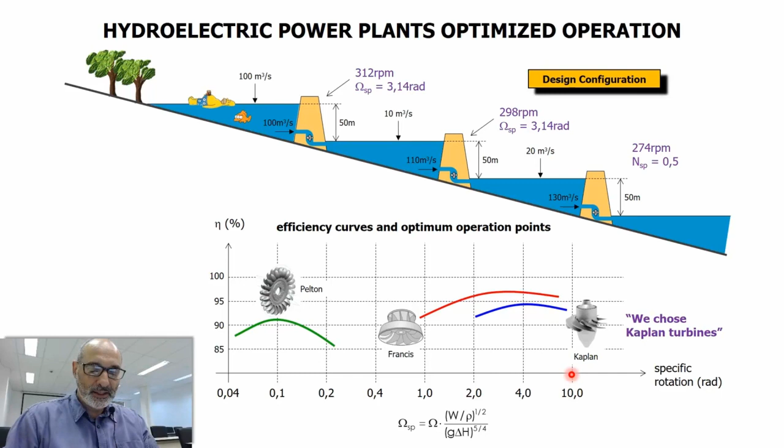So how do we control the turbine, and how can we model these performance or efficiency curves? What we can do, the operator can increase or decrease the flow rate that is being used to generate power. This can be controlled — you open or close this valve, you increase or decrease this flow rate instantaneously. Of course, during a year, this has to be equal to the average flow rate, but instantaneously you can vary it. So Q is variable or controllable.

This is one controllable parameter, and I'm emphasizing this because these other variations, you don't control them. They happen. So the point is, how can I change these flow rates in order to cope with these non-controllable variations, in order to optimize the overall system? That's our controllable variable, and as I mentioned, the turbine was designed for an average or nominal flow rate, which corresponds to maximum conversion efficiency. So when we vary this, we know that we're going to decrease the individual efficiency, but it may be increasing the overall efficiency.

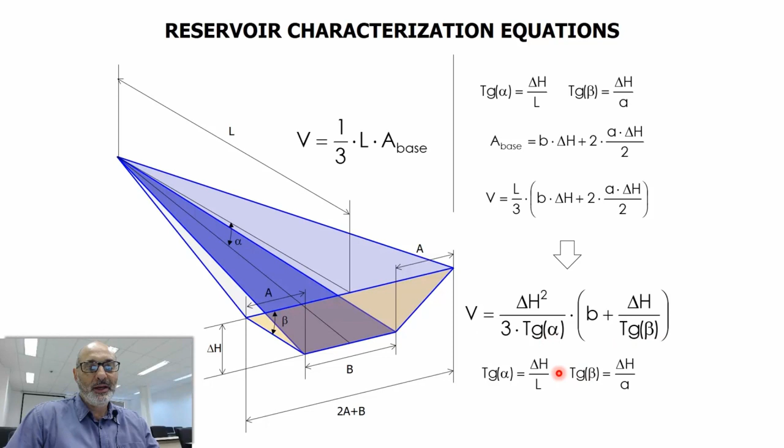So that's just a way of modeling things. The nominal point is the average between 0 and 1, or the average between the minimum and maximum nominal rotation.

Now the reservoir - this is the most important part, because you get this from the geometry of the reservoir, and what I want to show today is how this affects the overall performance. Suppose the geometric form of our reservoir is something like what's drawn here, a kind of pyramid cut.

So you have this form, this base, and you have all the parameters - the extension, the height, and so on. Capital A, B, beta, and alpha are the geometrical parameters.

And what we want to get here is a formula relating delta H to the volume. That's very important.

So you know that the total volume is one third of the height of the pyramid multiplied by the base area. The height here is L, and the area you can get from here, this formula. I'll pass quickly here, because the idea is not to make these calculations - you can do it yourselves afterwards.

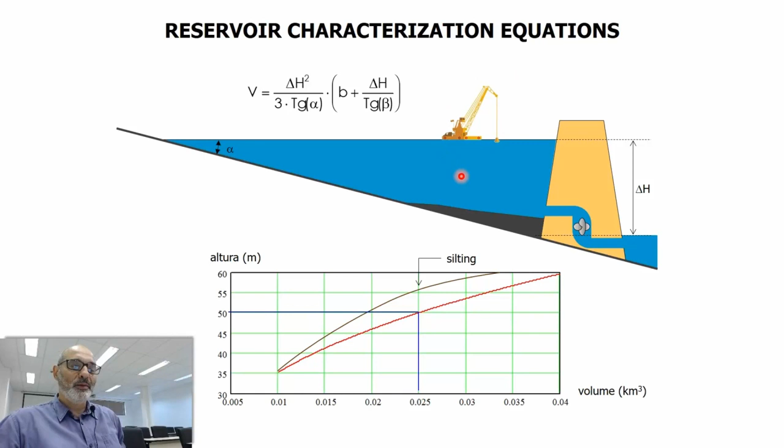And you get this final relation here, between H, the head of the reservoir, the pressure used to generate electricity, and the reservoir's volume. It's a complex relation because you have delta H here and here, but also delta H inside alpha and beta, since they are given by these formulas. This is very easy to do.

So the formula we have to use is this one, and by getting some typical results or typical numbers, we get this kind of result. 5 kilometers extension - this is a small reservoir - 100 meters, 200 meters, 50 meters. These are typical numbers for small reservoirs in the Tietê River.

So by doing the calculations, we get 0.025 cubic kilometers of water in this reservoir. And when you compare this with Itaipu, 29 cubic kilometers, and with Belo Monte, 2.5 cubic kilometers, you get these typical numbers.

Another problem interesting to emphasize is the effect of silting. You have material constantly being deposited on the bottom of the reservoir, and this solid material occupies volume. So what happens is that over time we have what we call silting.

So for a given volume, you have a higher height here in the reservoir. That means your reservoir is losing efficiency in terms of its storing capacity. So periodically you have to remove this material in order to recover its original performance, because the design was made...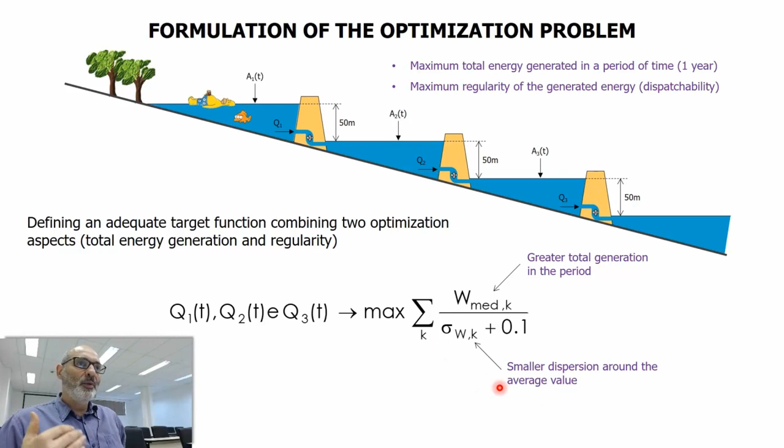So the specific rotation goes here, and in Q, the individual flow rate and delta H goes here. What I want to emphasize is that these are conflicting effects, because in order to have maximum efficiency, which corresponds to X equals 0.5, you have to satisfy this relation: the square root of Q multiplied by delta H to the minus 3/4 equals constant. No matter what you do with the flow rate, if the corresponding height satisfies this relation, you always have maximum efficiency.

But when you look at the reservoir performance, you see that when Q increases, you have a tendency to decrease the level here.

If you increase the flow rate, this is going to decrease if A1 is constant. So in order to maintain nominal condition, it would be interesting to maintain this relation, and this conflicts with this. Okay, so that's the base of the problem that we want to solve in terms of the instantaneous optimization.

Okay, so we have everything now in order to do the simulation. We want to adjust these flow rates in order to maximize this optimization function. And just to repeat, we want to maximize average power, because in the whole year this is going to result in a greater amount of total generated electricity, and we want to simultaneously minimize sigma in order to have more regularity.

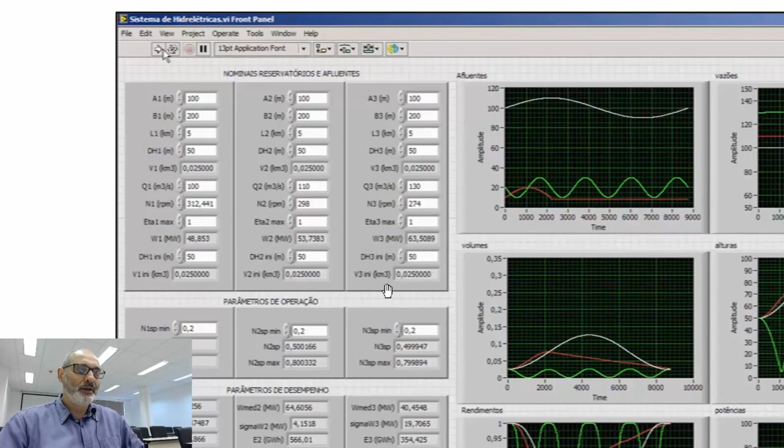Okay, so let's see the optimization strategy. It's very, very simple. I'm going to explain here. It is written here, and I'm using only two variables because it's simpler to explain. So follow me, bear with me.

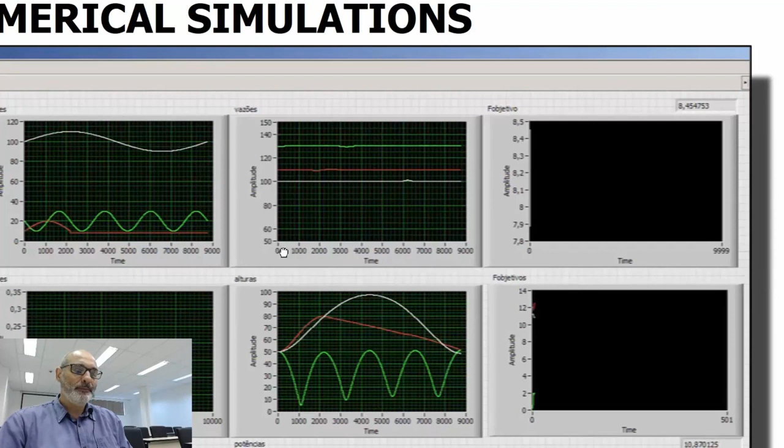You start by stating that the flow rate Q1 is going to be this value and Q2 is going to be this value. Then you make a random variation of one of those, so let's say that you step here. In your software you're going to test if this increases or decreases the objective function. If it decreases, you discard this variation.

If it increases, as here, you see you're closer to the optimal, so if it enhances the objective function, you keep this variation. And that's it. Then you repeat the process in the other direction. This one increases, so you keep the variation, and you keep doing this. So you have a heuristic that leads you to the optimum. That's what's going to be done.

I'm going to show you how. Yeah, and that's the software. So let me explain, if I manage, let me explain the software.

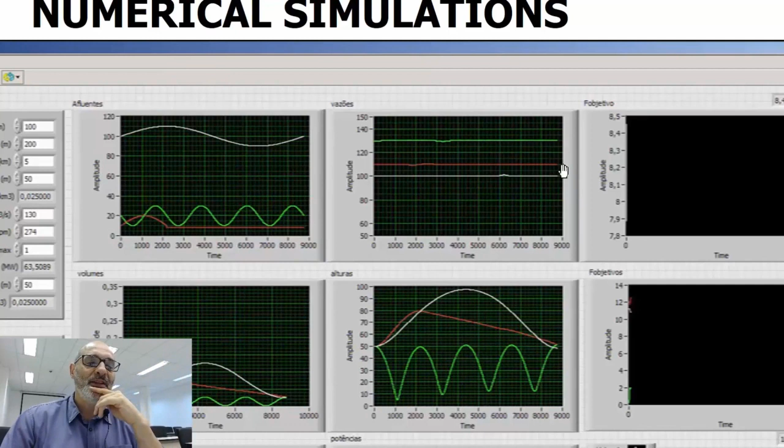So this is the control panel of this software. It's a simple software actually. So these are the reservoir characteristics: A, B, L, DH, and so on. And that's the total volume of each of these three reservoirs. Those are the turbines, the parameters that define the turbines.

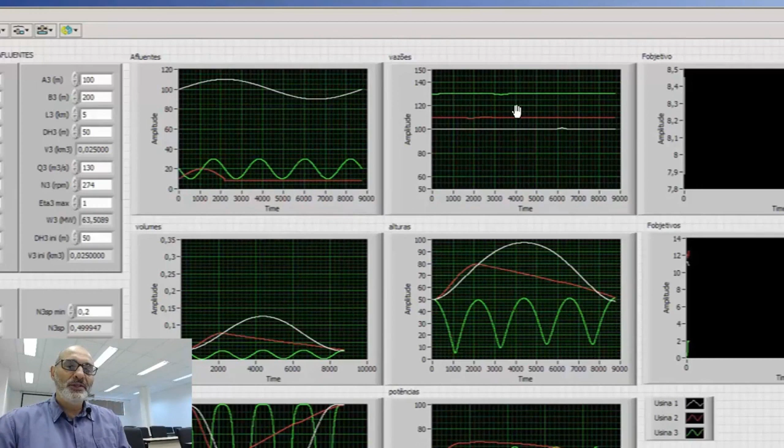And these are results actually. So instantaneous power of each turbine, and total generation, we see these. Those are the annual values. So those are the river and tributaries flow rates.

They are here. Here are the individual flow rates of each reservoir, this is Q1, Q2, and Q3. Here we have the volumes of each reservoir, the corresponding heads, H, this is delta H, and this is efficiency of each turbine during the year.

This is here you have time, and well, the power. This is W during the year. So what we're going to do, I'm going to start the software in a moment.

What we're going to do, we start from an operating scenario, for instance constant flow rates in each, or almost constant flow rate in each reservoir. So this is Q1, Q2, and Q3. I'm going back one slide. So what we're going, this starting point here means constant flow rate during the whole year for the three reservoirs.

And what we're going to do next is to vary each day's flow rate. Because, if I'm not mistaken, yeah, this is hours, so this is a whole year in hours. So we are going to vary the flow rates for every hour during the year. We make a random variation here. If it enhances the objective, we're going to keep that. If not, we discard.

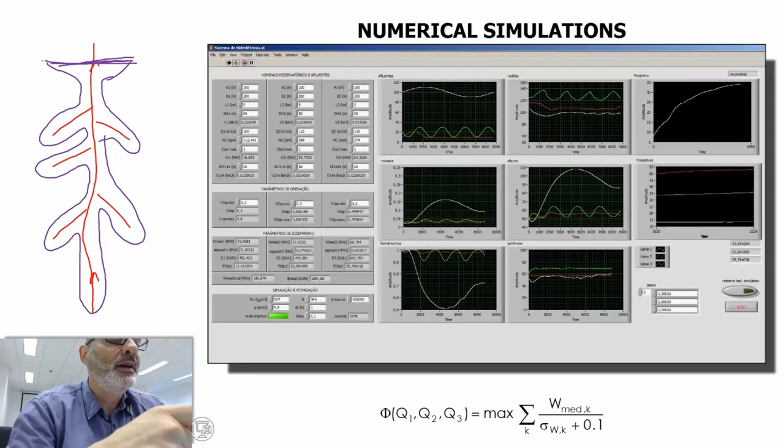So what we're going to do is change this optimization function, to see if by changing it we reach the same conclusion - to sacrifice the first reservoir for the sake of the following reservoirs downstream. So that's the first question that I want to answer now.

Another question is, what is the effect of the size of the reservoir? Because I started this class by saying that it's better to have big reservoirs, but you have environmental problems. That's very typical of Belo Monte - you know, the original Belo Monte design...

...the size of the reservoir was much bigger. Belo Monte is something like this: you have the main river, you have the tributaries here, so it's flowing right here. Let me change color here - the original design had a dam, and let's suppose the lake is going to be something like this. That's the original expected lake for the Belo Monte project.

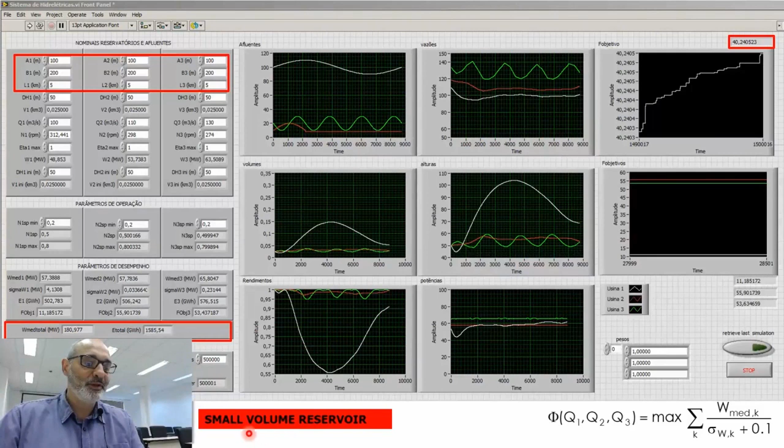That's the original lake. So this flooded area was too big, and due to environmental concerns, they decided to restrict the flooded area. How do you do this? You do this by making more reservoirs, more dams actually. So in addition to this dam, you build here and here, and then your lake is going to be something much smaller.

I hope my drawing helps - so the lake, or total volume, is much smaller, but it floods a lot less area. The point is, I'm not questioning this, but you have to be aware that this influences the overall system, to the point that it would be better not to have these hydroelectric power plants. That's my opinion - it would be better to have, I don't know, a biomass thermal power plant.

But so the second question is to try to analyze the volume for the reservoirs here. So we're going to compare the operation with small and big reservoirs to see what's the difference. The number we can use is going to appear here, just to be more objective - the numeric value of this number here. So let's see how it goes.

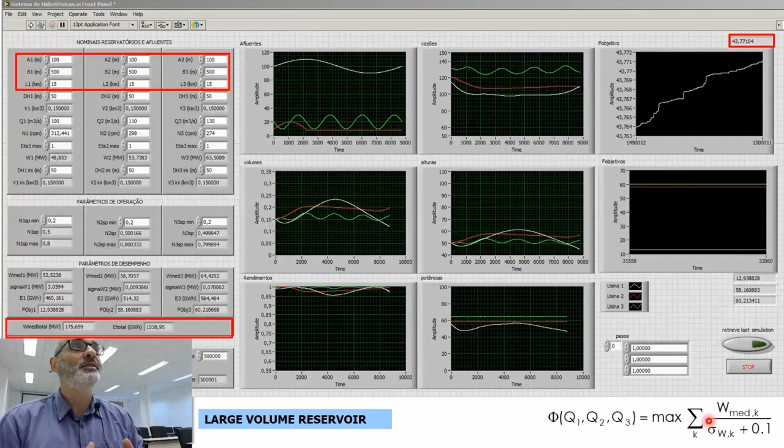I'm going back one slide. So we had 43, okay, that's our numeric value for our optimization function. And simply by working with a bigger reservoir, we have an increased generation.

We can also see this in terms of the average power and the total energy generation in gigawatts and megawatts. So we had 1,585 here, and here 1,538 gigawatt hours. So we managed to increase the total generation simply by working with a larger reservoir. That justifies what I'm saying, that it's better to have bigger reservoirs.

So now let's see the influence of the optimization function. I'm going back one slide. So instead of adding the terms... if you increase the size of the reservoir...

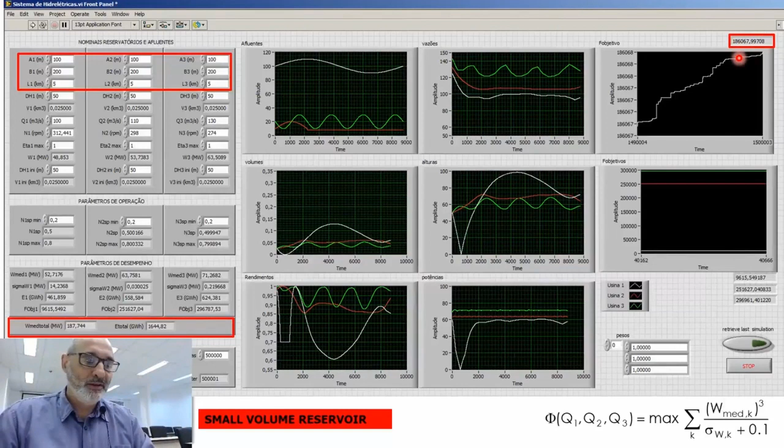The point is that with a bigger reservoir, you can use its height. I don't know if you see here, but the heights vary very little. So with a bigger reservoir, the height does not have to vary a lot to accommodate these variations. That's the point. You keep the height constant, and that tends to produce higher instantaneous efficiency, because you don't deviate too much from the nominal point with a larger reservoir.

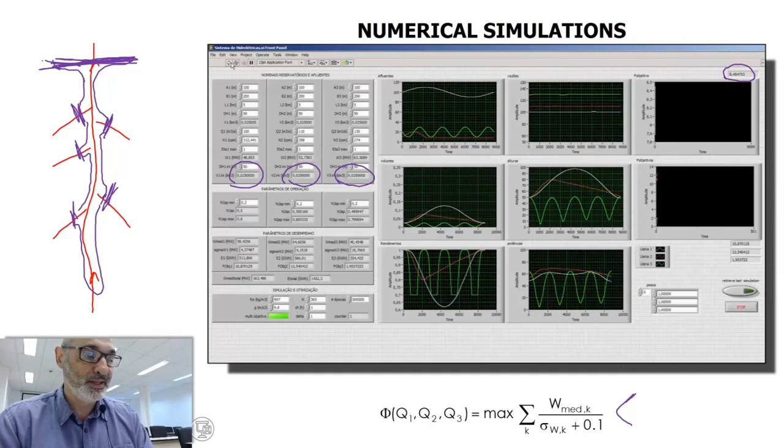So the next slide compares a different optimization function, the same evaluation. Now instead of adding up all the terms, we're multiplying them. The effect is exactly the same, no problem, and we get the same conclusion. The number here is different because the formula is different. So that's the result with a small reservoir, 2,278, and this is the result with a larger reservoir, 6,640. The amount is the same.

So, let me see if I still have that. Yeah, and that's why by reducing the size of the reservoir in Belo Monte, I sustain that, if we make the proper calculations, we might conclude it would be better not to construct this reservoir at all. It's very good in terms of civil engineering because you have more civil engineering structures, you have to spend more concrete and so on. So for those guys that supply concrete, it's a very good business, but for electricity generation, it's not good.

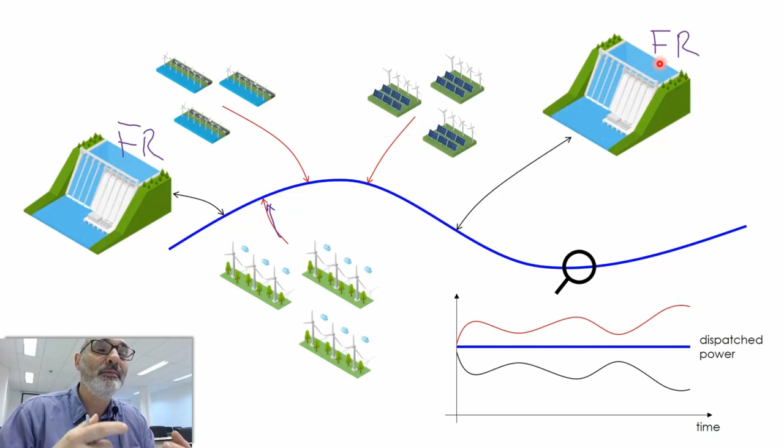And when you need it, if wind stops, for instance, you can use this water to generate through the turbines. So in addition to the turbines, you can also have pumps, and as I was saying, you can use this excess power in order to store this excess energy in the form of water stored in the reservoir, which you can use to generate electricity if you don't have any more of this excess power.

So what I call functionality of the reservoir is becoming increasingly important in a scenario in which you have several sources of intermittent performance. So the point is not to generate a lot of electricity. I showed you, we made calculations that the potential for growth in terms of generation is very limited for hydropower. But in my opinion, the role they are going to play is not in terms of supplying power to the system, but in terms of compensating the fluctuations of these intermittent sources.

So that's a very important role, because you have very few systems that are able to cope with this task, because the quantities are very, very high. You cannot use, for instance, biomass to do this. Biomass is a very stable source of energy. You store biomass, for instance. You can burn more or less in order to generate more or less electricity, but you cannot store the equivalent of dozens of cubic kilometers of water in terms of energy. That would be too much biomass.